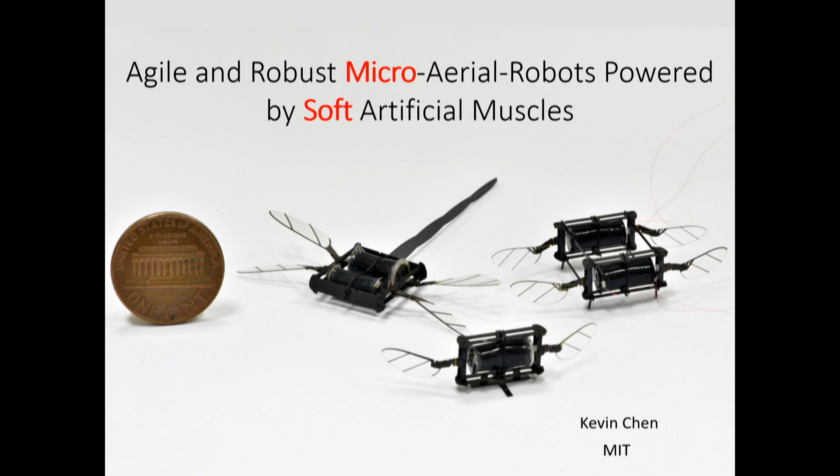Great, thank you so much for the nice introduction. Okay, let me get started. So I want to talk about agile and robust micro-aerial robots powered by soft artificial muscles. If you look at the title, there are two keywords: micro and soft. I want to spend the first 10 minutes explaining what micro-robots are, and then focus on a new class of micro-robots powered by soft artificial muscles.

When most people think about robots, they think about large-scale robots like legged robots, humanoid robots, trains or airplanes, spanning the scale of meters to hundreds of meters. On the other end of the spectrum are very tiny robots made with MEMS technology, ranging from tens of microns to hundreds of microns. What I want to talk about today is insect-scale robots, specifically ranging from 1 to 5 centimeters, weighing from 10 milligrams to 10 grams.

As a quick example, when I was a graduate student at Harvard, we worked on a project called the RoboBee. The goal of the project was to create something with similar size and functions as bees in nature. So very quickly, I want to address several questions together.

The first question is, why do we study microrobots? To me there are two answers. The first is that by leveraging interesting physics at the centimeter scale, we can enable new functions in this robot. In this case, by leveraging flow similarity, we showed the same robot was able to both fly and swim using the same actuators and wings.

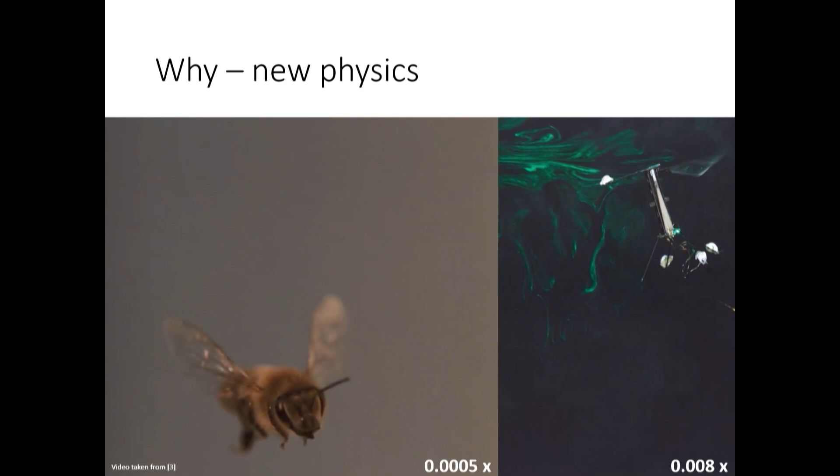More than that, we can use a micro-scale robot as a platform to investigate interesting physics at the centimeter scale. By looking at the flow field generated by a flapping wing robot, we can infer the lift and drag generation mechanism of flying insects.

The second question I want to answer is, what makes micro-robots unique compared to larger-scale robots? The short answer is that inertia becomes a lot less important, whereas surface effects become a lot more important. As a consequence, you can drop a legged robot from very high above and see very small changes to its performance. More than that, my colleagues have shown that micro-robots can jump off the surface of water, something very challenging, if not impossible, for larger scale robots.

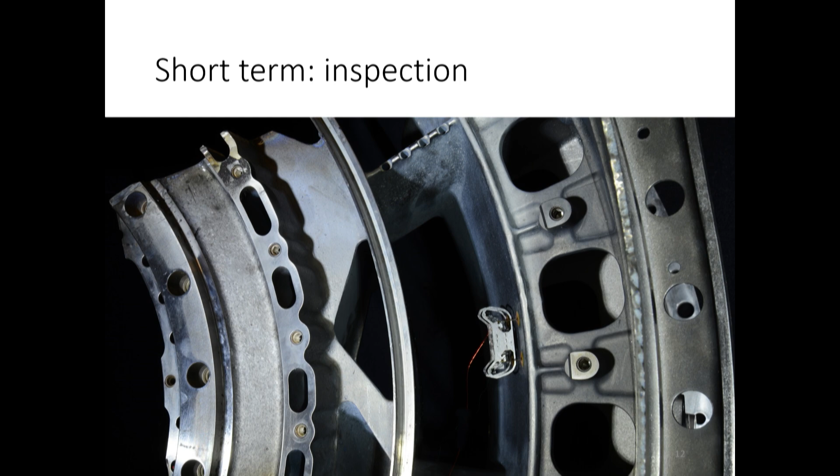The next question is, what are potential applications of micro-robots? In the short term, I can think of many. For example, I can put a camera on top of a legged robot and teach it to climb inside a turbine engine and look for cracks. In the longer term, I'm envisioning using a large number of micro-scale robots applied into complex situations.

Now, this vision is fairly far-fetched. There's a lot we cannot do right now, so I'll come back to the major challenges toward the end of this talk. What I want to do today is tell you about 3 examples of micro-scale robots. The first theme relates to the fact that micro-scale robots, although tiny, can do multiple things in multiple environments that are sometimes challenging for larger-scale robots. Then I'll spend most of my time today on a third project, a new class of micro-robot we've created at MIT, powered by soft artificial muscles.

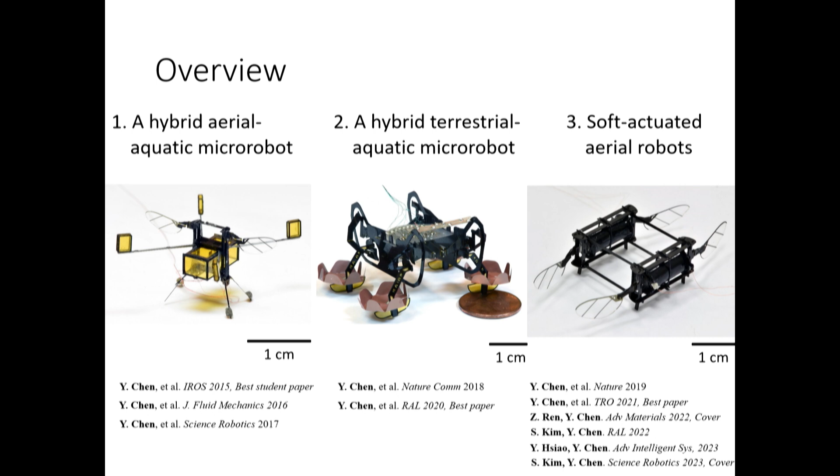So first, let's start talking about flying robots. If I want to make a flapping wing robot that can fly, I first look into nature for inspiration. Imagine my arm as the leading edge—the wing stroke motion is actively controlled by an actuator, whereas the wing pitch rotation is passively mediated by a compliant flexure. This is a quite complex system that requires us to study the fluid structure interaction. We've set up a physical setup that allows us to capture hundreds or thousands of flapping wing videos.

And not only can we capture the flapping wing kinematics, we can also measure the associated fluid flow. In this case, by looking at the particle image velocimetry experiment, we can measure the flow field and the corresponding vorticity field. By looking at the growth and shedding of leading edge vortices, we can develop a lot of intuition about how efficient our flapping wing motion is.

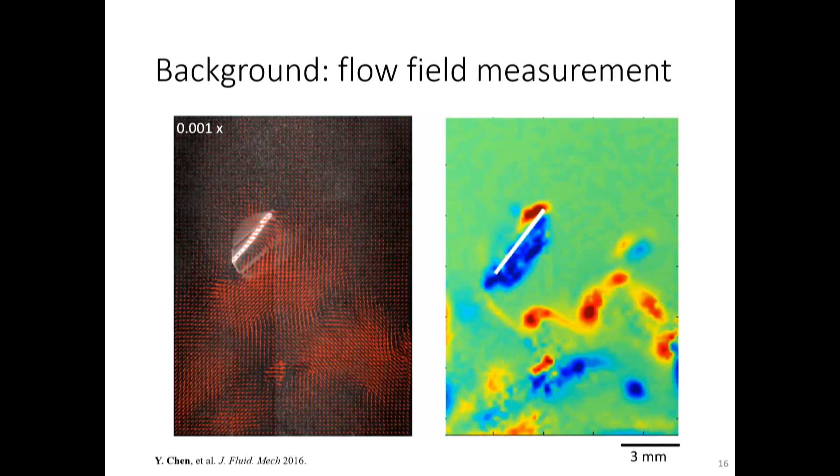In addition to creating at-scale experiments, we also develop our own numerical solvers for simulating flapping wing flight. In this case, we are showing you the pressure profile on the wing surface, and the isovorticity contour again allows us to infer about the efficiency of the flapping wing system.

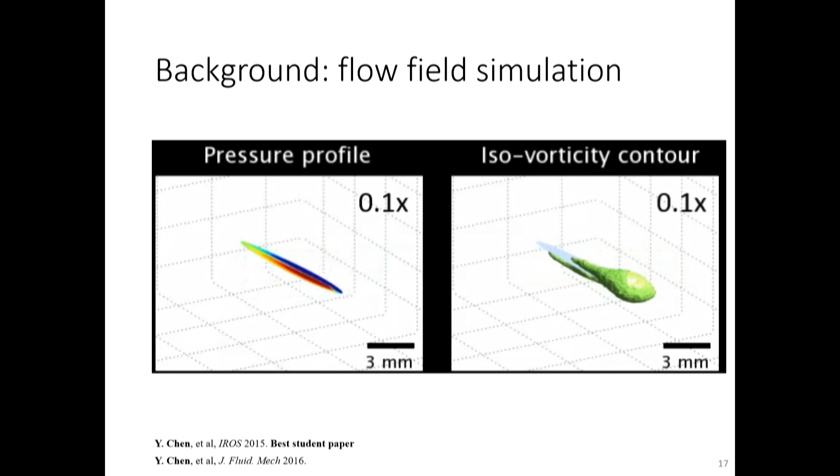With this suite of numerical tools and experimental tools, we are ready to ask interesting questions. For example, the question we want to ask is, is there any similarities between flapping in water versus flapping in air? And if there is similarity, what interesting robotics functions can we enable?

So we proposed a project. We want the same robot to be able to fly, to swim, and also making transitions from air to water and from water back into air.

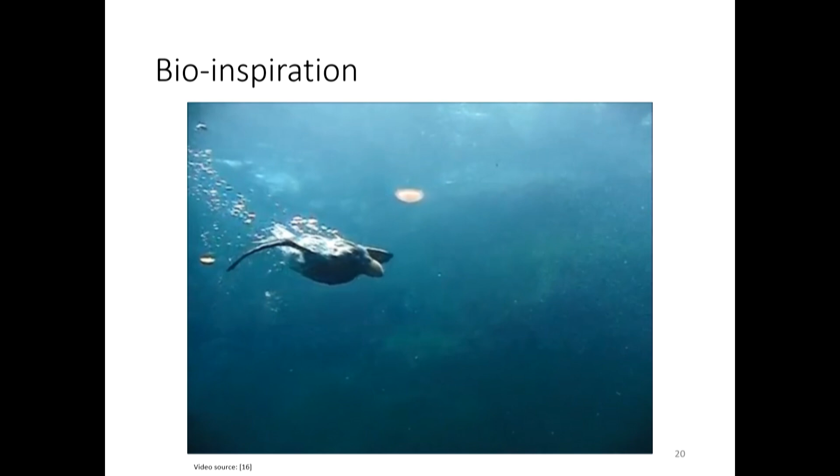To solve this challenge, we first look into nature for inspiration. Puffins are quite amazing animals. They can fly, and they can take a dive into water. Once they're under the water, they will change their flapping frequency so they can swim around and chase for prey. Using a similar idea, we created a new robot with four wings for added lift, buoyant outriggers for maintaining stability on the water surface, and more interestingly, a gas collection chamber for impulsive takeoff.

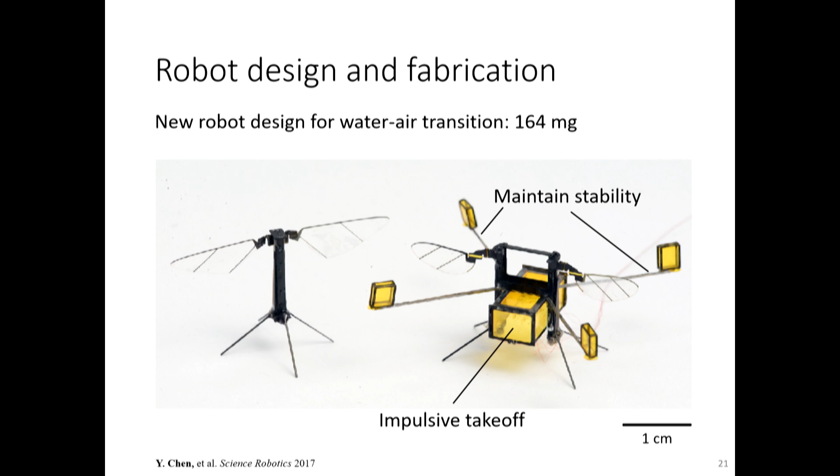So I don't want to spend a lot of time focusing on this project, so let me just show you what this robot can do. If I start this robot submerged in water, it will flap its wings at a relatively low frequency on the order of 10 Hertz, and it will reach the air-water interface.

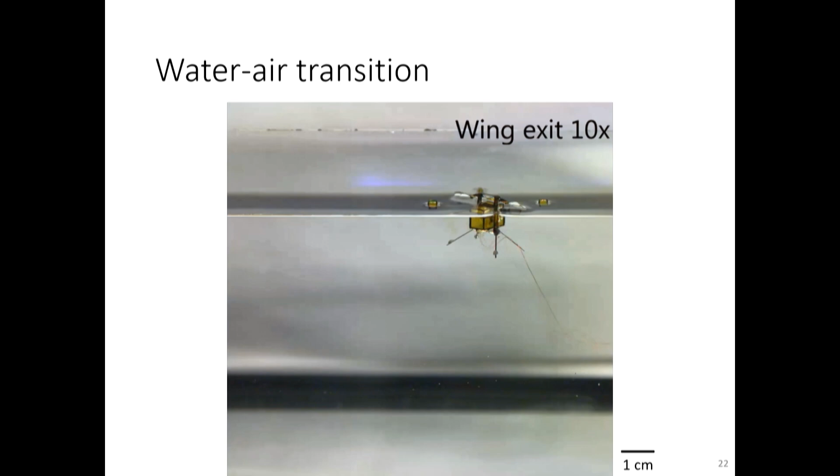Once it reaches the water surface, we will turn off the wings and turn on a parallel plate. What the parallel plate does is convert water into a mixture of hydrogen and oxygen, and the buoyancy force will slowly push the robot's wings and fragile structures out of the water surface. And more than that, now the combination of gases can be used as fuel, and we're going to ignite them so that we can generate a huge force to break the water surface.

So I recommend you to pay attention to this video. We ignite, and then this combustion completes within 1/1000th of a second, impulsively generating a large enough force to break the water surface, which allows the robot to transition back into air.

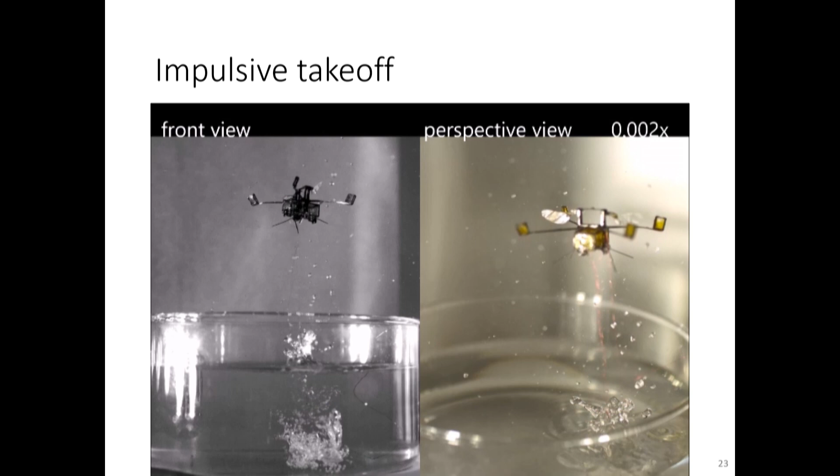Now, at this moment, the robot cannot fly immediately after this, just because of all the water that's on the robot. It has to wait for about 15 minutes for it to dry, and then it can fly again.

So in summary, we have created a 164 milligram robot that can do multiple things, including flying, swimming, transitioning from air to water, and impulsively transitioning from water back into air. So this is one demonstration of how a tiny robot can do multiple things, and some of those tasks can even be challenging for larger scale robots.

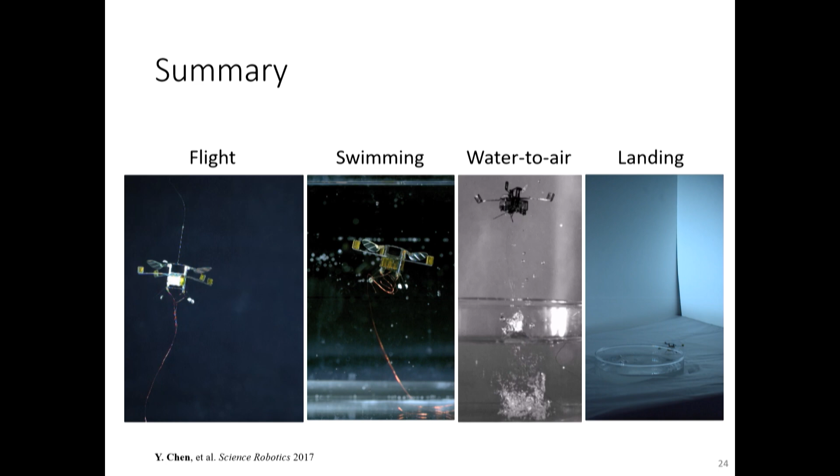Following the same thread of thought, now I want to introduce another project in which we started to think about multimodal locomotion in legged robots.

If I think about the previous project, we used combustion to overcome surface tension forces that's over 10 times the weight of the robot. Because at the very tiny scale, surface tension is much, much larger than the weight or the forces that the robot can generate. On the other end of the spectrum, as humans, we barely feel surface tension at all. And that's because our weight is more than 1,000 times that of the surface tension that we feel.

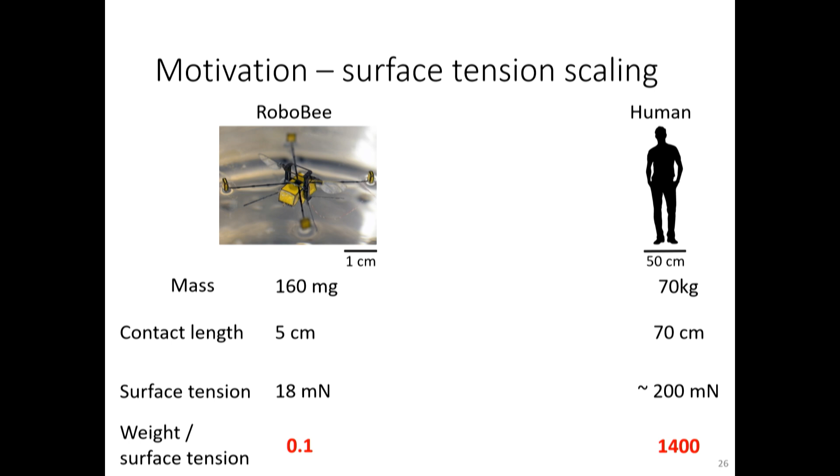Well, if you create a slightly heavier robot that's on the order of a gram, and if its contact length is on the order of 10 centimeters, then surface tension forces and the robot weight are on the same order. Now, if you can manipulate the surface tension forces, you can really start to do something interesting. So again, we return to a question in physics: how do we control the magnitude of surface tension forces? And if we can control surface tension, what additional locomotive capabilities can we enable?

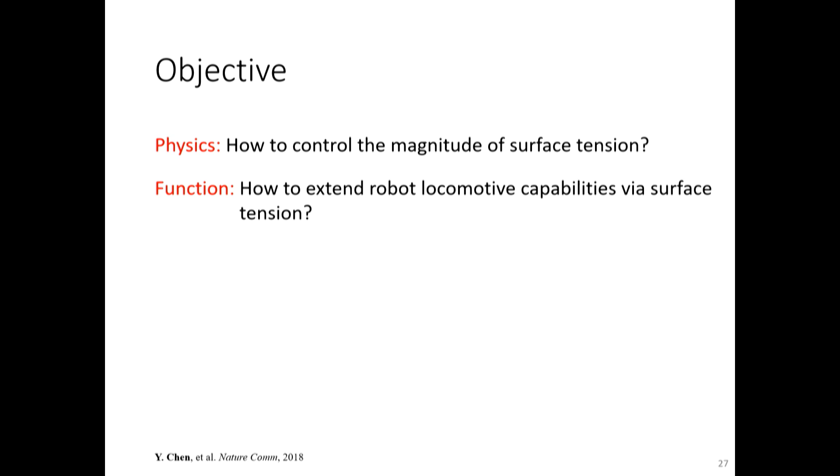So we came up with a new project in the sense that we want the same robot to be able to work on land, on the surface of water, controllably transition into water when it wants to, and eventually return back onto land.

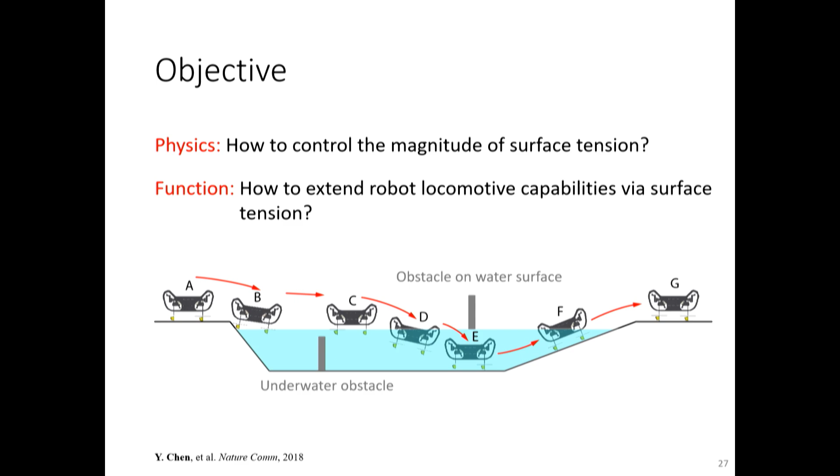What's really challenging in this case is that sometimes the robot has to generate forces less than water surface tension, and sometimes it has to reduce the surface tension so it can sink. Without going into the details of implementation, we used a physical phenomenon called electrowetting, which allows us to modulate the contact angle and therefore change the surface tension forces.

Let me show you a demonstration. This robot starts on land, transitions onto the water surface, and swims to a targeted site. Once it reaches this site, we turn on the parallel plate, and the electrowetting footpad will sink the robot underwater. Now the robot is completely submerged, and then it will climb this incline to return back onto land.

So in this very short demonstration, there are many things happening. The robot is leveraging interesting physics to control surface tension forces. Therefore, it can either walk on the surface of water or transition underwater. The process of transitioning back onto land also requires the robot to fight against a surface tension force that's larger than its own weight.

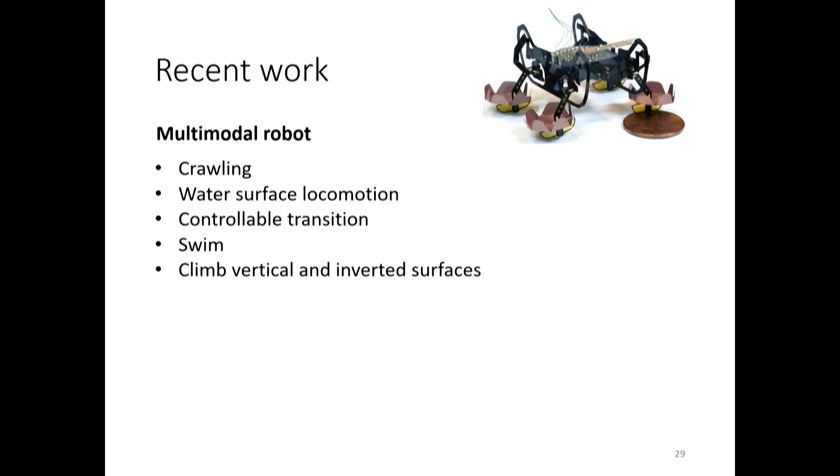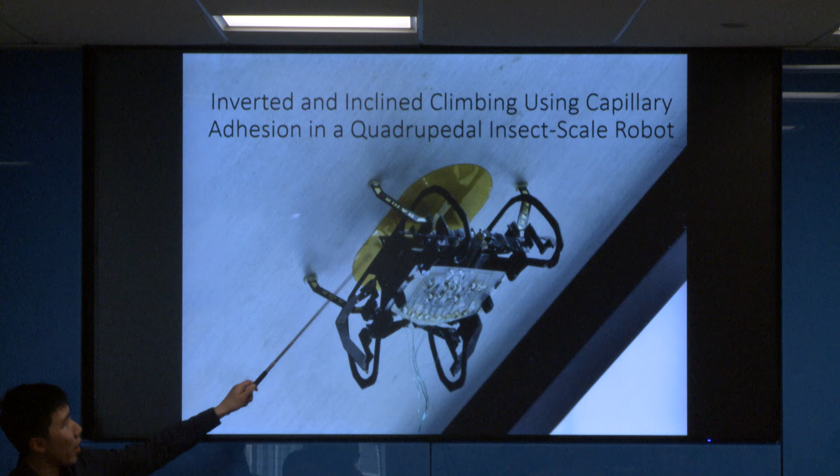Until recently, we were thinking about continuing to extend the locomotive capability of this robot, and specifically, we want this robot to be able to climb on walls and ceilings. At MIT, we simply put a compliant Kapton footpad on the belly of this robot.

We leverage a combination of capillary effect and adhesion forces. If we put a very thin water film in between the interface and the adhesion pad, there's a large adhesion force that maintains the robot on a surface, but the lubrication force allows the robot to slide along the surface. As a consequence, climbing becomes passively stable, so you don't really need a lot of sensing and feedback control. The robot can just operate as if it's walking on land, and it can walk inverted on a surface.

In summary, in the first two projects, I've shown you two examples of microrobots that can leverage interesting physics to perform interesting functions, and some of those functions, I would argue, are unique compared to larger scale robots.

Now I want to change gears and spend most of my talk today explaining a class of new soft actuated microrobots we are focusing on at MIT. First, I want to zoom out a little and say that our longer term vision is to create a swarm of ubiquitous and multifunctional microrobots that can operate in realistic environments.

So far, the examples I've shown you demonstrate that microrobots can operate at high frequencies, and they're very precise. My colleagues in this field are solving key problems in sensing, control, and power autonomy, but I want to argue there are key questions that we are missing.

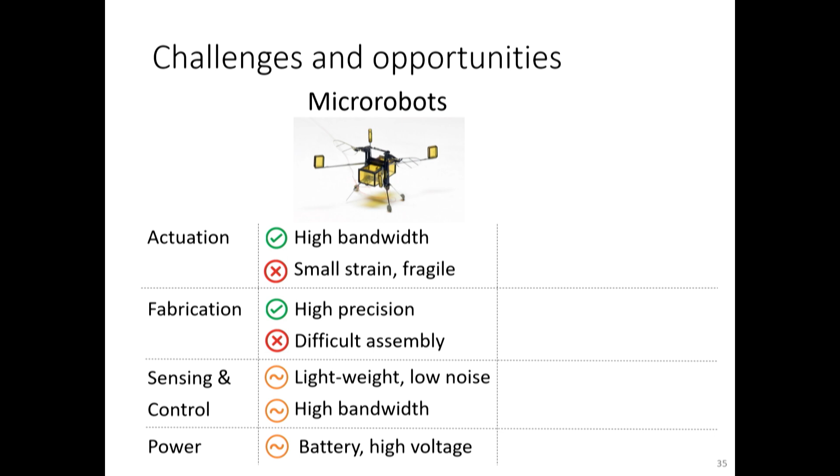I propose we look into another field, called soft robotics. For a very long time, people have known how to make soft robots cheaply, and more than that, soft robots have a very large range of motion. We have new sensing and control methods for soft robots, and in addition to using a battery, soft robots can also be powered by pneumatic or chemical sources.

But soft robots also face their own challenges. Specifically, most soft actuators are slow and not as precise as rigid actuators, and as a consequence, the functionality of most soft robots is limited compared to state-of-the-art rigid robots. So how do we address challenges in both fields?

We propose to look into a new direction, what we call hybrid soft-rigid microrobots. Specifically, we envision that future microrobots will be powered by soft artificial muscles that have very high power density, while having rigid appendages for effectively interacting with the environment.

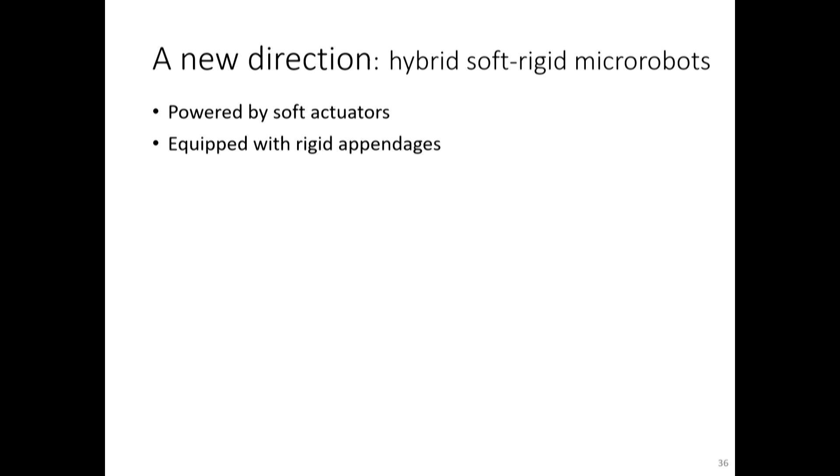I want to show you an example of a robot we are focusing on today at MIT, which is a flying robot powered by a soft artificial muscle. I want to convince you of several things. First, I want to show you that this soft artificial muscle can operate at hundreds of hertz, much, much faster than existing soft actuators.

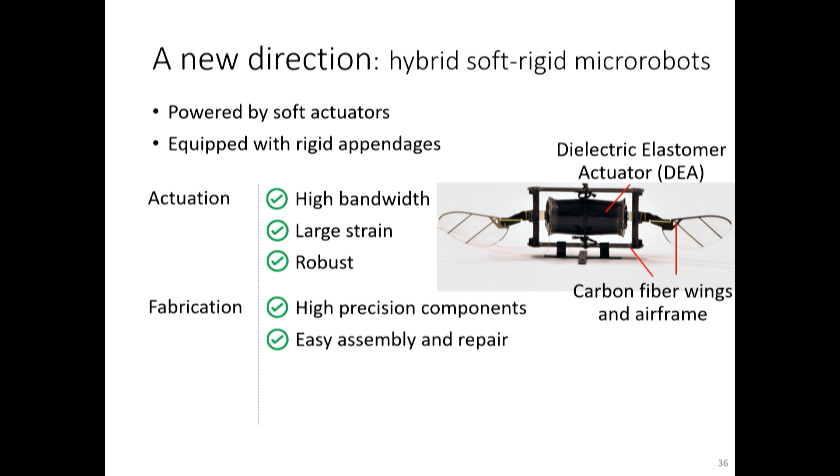I also want to show you that this robot still has very precise rigid components, such as transmissions and linkages, so we can control them with high precision. More than that, because we are combining soft and rigid, hopefully I can convince you we can enable interesting, unique functions, such as sensing collisions or recovering from collisions.

On a higher level, this soft robot consists of both rigid and soft parts. It has rigid airframes, precise rigid transmissions and linkages. What's quite unique is that the central part of this robot is powered by a dielectric elastomer actuator, which is soft in nature.

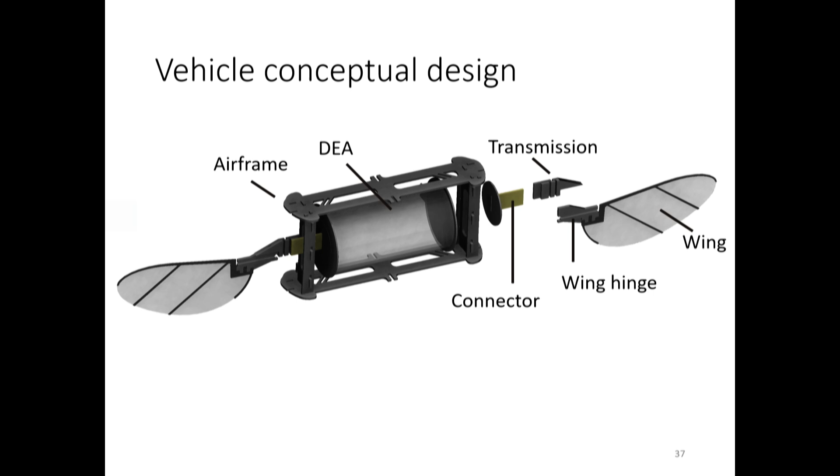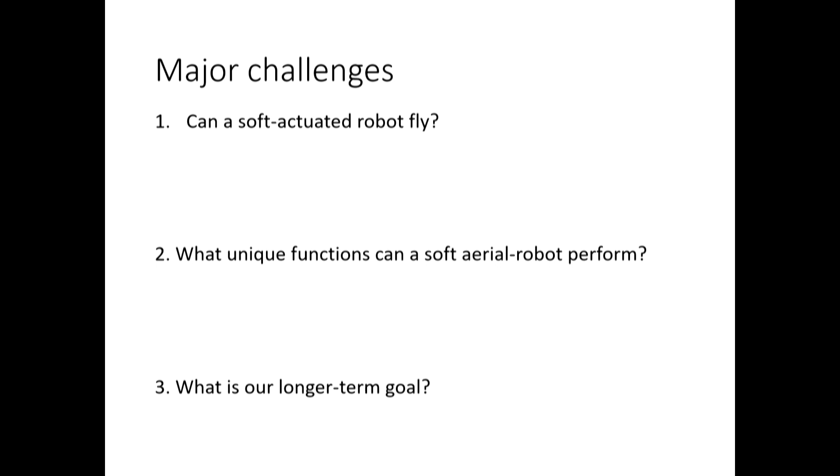Our research is motivated by the desire to address key challenges, so I want to answer three key questions. First, I want to convince you that soft robots can fly. If I show you that, I can also show you why we are making a new class of aerial robot. Hopefully I can demonstrate new functions in those soft robots. Finally, I also want to tell you about our longer-term vision about where we want to take this micro robot. First, let me convince you that soft robots can indeed fly.

I have experience playing with rigid actuators for many years, and specifically I struggled with piezoelectric actuators for a very long time. Piezoelectric actuators are great in the sense that they are very high frequency and very precise. However, they have very tiny strain, which means assembling them into a micro robot takes a lot of training. Even worse, when a flapping wing robot is driven by a piezoelectric actuator, you have to be very careful about operating it. You don't want the wing to hit an obstacle, because otherwise the impact can be transmitted to the actuator, which may cause it to crack.

So here at MIT, we developed a novel soft actuator. I want to show you that this dielectric elastomer actuator can operate at an equally high frequency range, on the order of 500 Hertz, while having very large strain, on the order of 10%. Because it's intrinsically soft, we can install this actuator much more easily into a micro-scale robot, and we can make a lot of them more scalably.

So with this actuator, let's talk about the key requirements for achieving flight. Let's not worry about the mathematical equations, just keep in mind the key ideas. To fly a robot, you have to satisfy a few requirements. First, you have to generate a lift force larger than the weight of the robot. While generating lift, you're inevitably also generating drag force, so the block force of your actuator has to fight against the drag force through a transmission ratio. Finally, you want to match the resonant property of your robot to the resonant property of your actuator. What I really focus on today is the requirement on bandwidth, free displacement, and block force of the soft actuator.

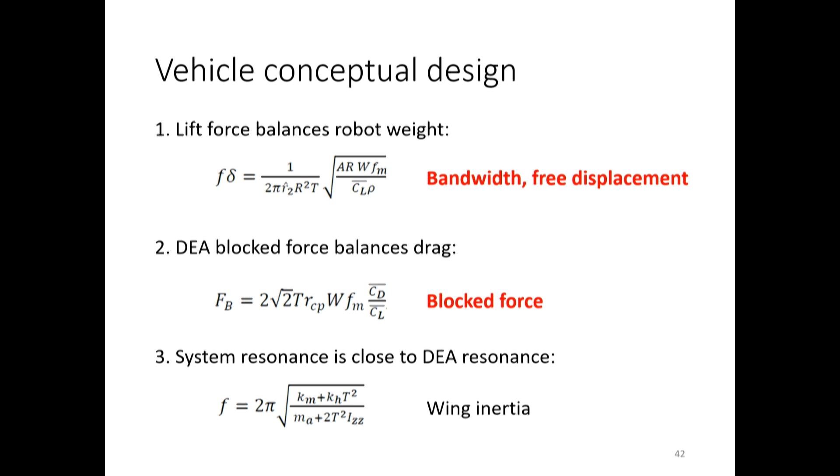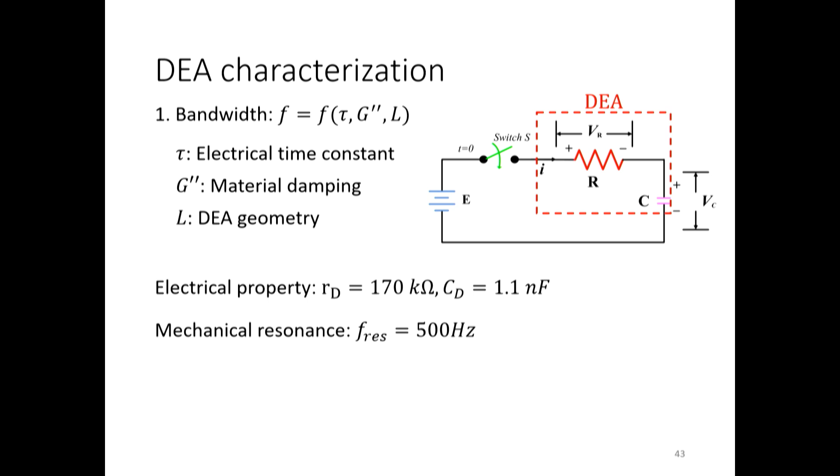First, let's talk about the bandwidth of the actuator. We model the actuator as a series RC circuit. We measure the electrical property and find the RC time constant is on the order of 0.2 milliseconds, which translates to an RC frequency of 5 kilohertz. So the bandwidth is not limited by electrical properties, but rather by mechanical properties. We spent a lot of time choosing elastomers of low viscoelasticity and optimizing the geometry of the soft actuator to generate a resonant frequency as high as possible. In the end, we targeted something on the order of 500 Hertz.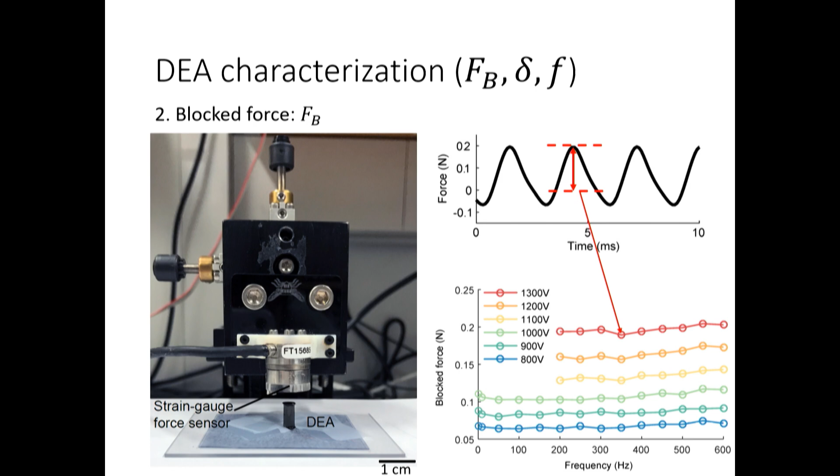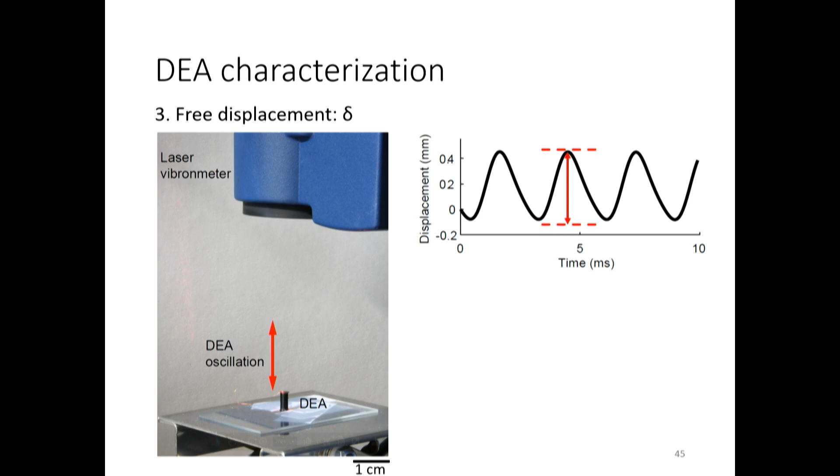After knowing the behavior of this actuator, we can also measure the free displacement. Again, we place the actuator under a laser vibrometer and drive it with a purely sinusoidal signal, measuring the peak-to-peak motion as the free displacement. We vary the driving frequency and amplitude to map out the behavior. You can see from this plot that the resonant frequency of the actuator is on the order of 500 Hertz. Now, if I multiply the block force and the free displacement, I can estimate the energy density of the actuator, or its power density.

It's actually a quite important takeaway here. Based on the analysis we did a couple of slides before, we reasoned that as long as an actuator has a power density higher than 200 watts per kilogram, it is possible to achieve flight. In this case, our soft actuator has a much, much higher power density, which really implies that flight is possible.

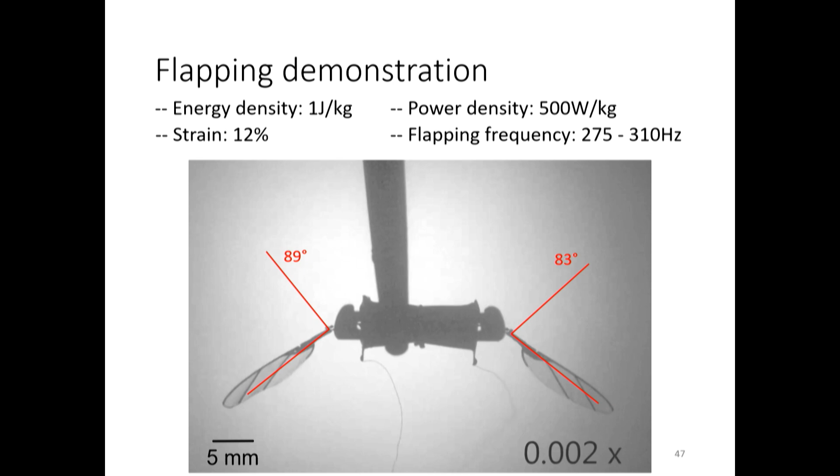So with that, we installed the soft actuator into our robot. In this particular video, the robot is flapping its wings at 280 hertz, which is even faster than the state-of-the-art rigid robot. Just by looking at that video, having looked through thousands of flapping videos, we know that we are generating enough lift forces.

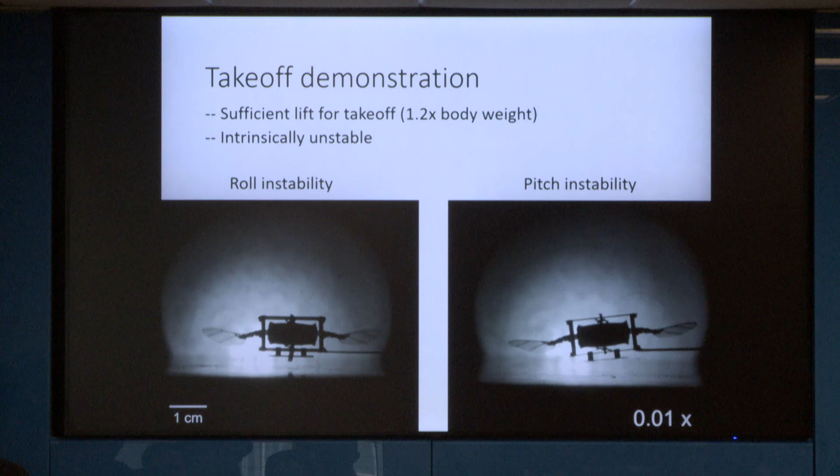So about 4 years ago, we demonstrated the first lift-off of a flapping wing robot. You can see the artificial muscle in the center really behaving like true muscles, elongating and contracting. I would say this is a very exciting moment for soft roboticists, but not very exciting for aero roboticists, because this robot is flipping over in 0.1 seconds, intrinsically unstable, so it's really not very useful yet.

Our main task is to stabilize this robot. So to stabilize it, we put two units together. And if I can somehow induce a yaw torque, that is, teach the robot to rotate relative to its body z-axis, then effectively the robot is behaving as a spinning top, and I can use that precession to stabilize the robot.

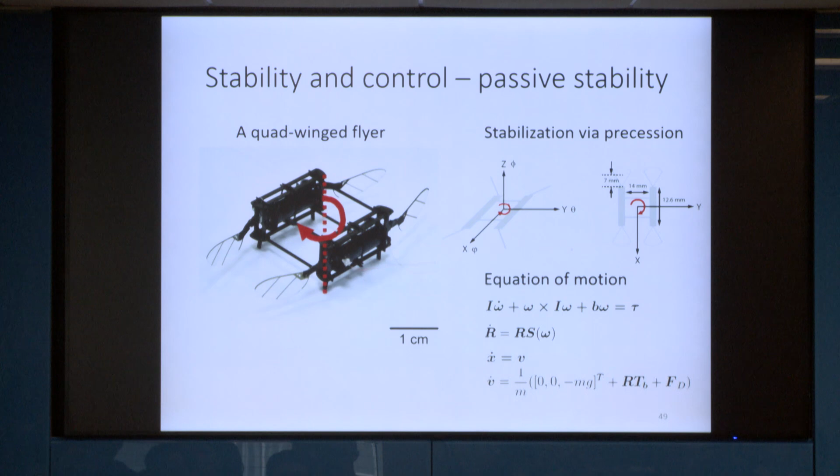Of course, to prove stability, we have to look at the relative contribution between the moment of inertia tensor and the yaw torque. But skipping over the mathematical proof, in both simulation and experiment we've shown this robot is passively upright stable, and it can fly upward at about 30 centimeters per second. This is impressive because there is no sensing or feedback control involved, and I'd argue this is very important for tiny scale systems lacking the ability to do sensing at a high frequency.

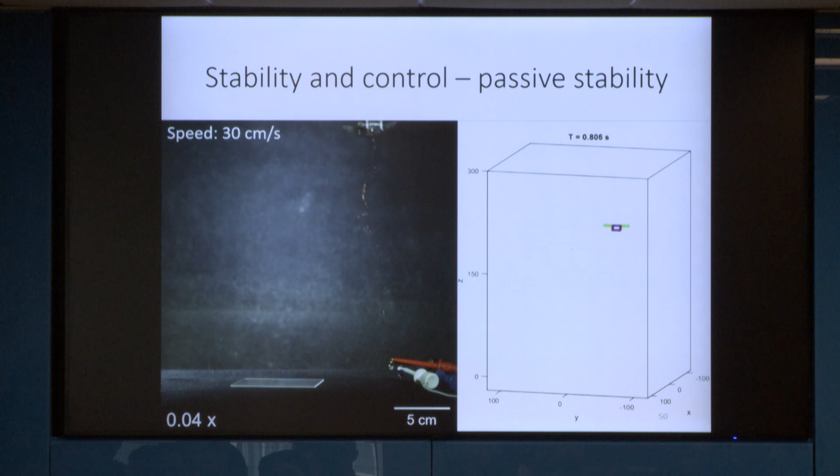So far I've shown you that soft robots can take off, and they can be passively upright stable. The key question for soft robotics is: are soft robots controllable at a high frequency? Our lab has spent the past 4 years working on flight controllers.

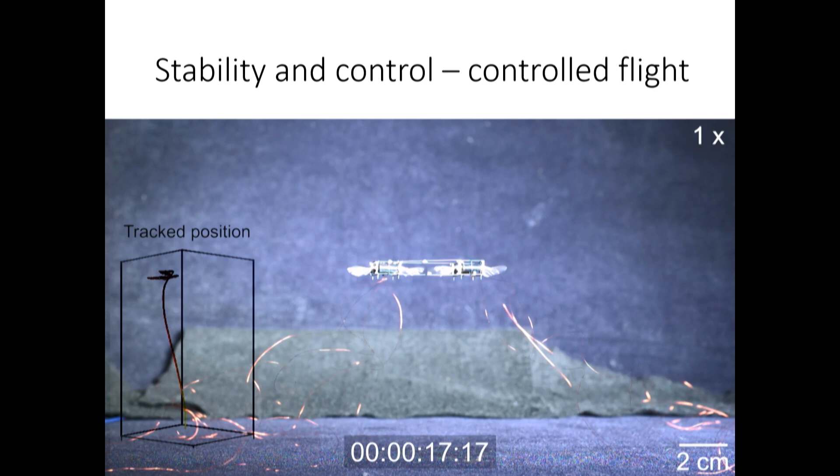Let me show you something we achieved about 2 years ago: a 20-second hovering demonstration shown in real time. This is one of the longest hovering flights done among any sub-gram aero robot at that time, and as you can see, this robot is really quite stable, staying at a fixed point very stably. Looking at the attitude or position error, the maximum attitude error is about 2 degrees within this 20-second flight, and the position error is about 1 centimeter.

Our lab is continuing to push the endurance of the robot. As of 2 years ago, we could get to 20 seconds. As of last year, we got to 40 seconds. And hopefully by the end of this year, we can push it to be on the order of 100 seconds or so.

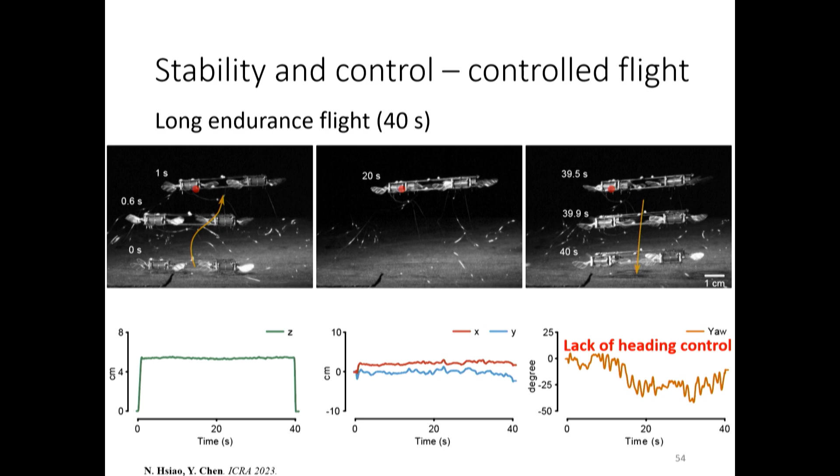But there is one key shortcoming: although we have position control, we don't have heading angle control. So when the robot is flying, it's just passively yawing. Imagine in the future I want to control the robot to stare at something - that would be very challenging.

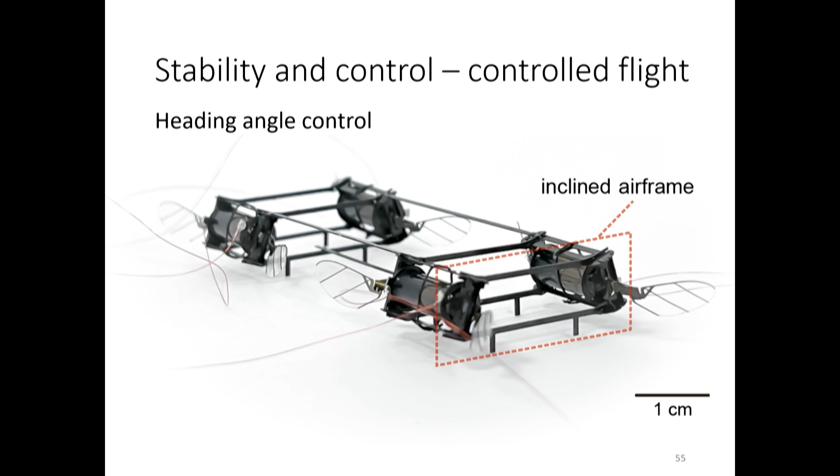To solve this, we propose a new configuration in which we slightly tilt the robot so we can use a component of the lift force to generate yaw control torque. Skipping over the controller implementation details, we can now track the yaw angle quite well - the robot turns left, then it's commanded to turn right, then it turns forward, and then it lands.

There's still a little bit of coupling, meaning that when the robot turns, we still have a little bit of coupling in the position error. But I'd argue that suffering a couple of centimeters of position accuracy for fairly good attitude heading angle control is reasonable.

Until very recently, we started collaborating with Professor Jonathan How's team, implementing a model predictive controller on our robot. So the robot can now track trajectories quite well, and more than that, we can track aggressive trajectories, such as a somersault. I'll say more about that later in this talk.

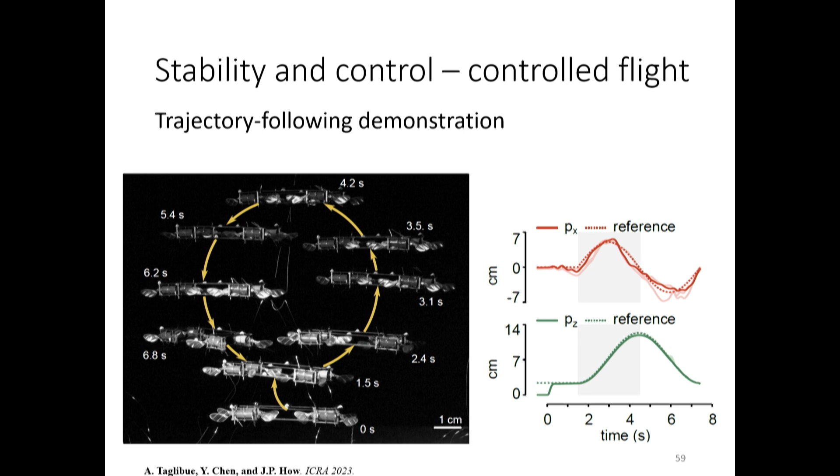So hopefully, so far, I've convinced you that indeed, soft robots can fly, and they can fly just as well as the state-of-the-art rigid robot at the micro scale.

But the more interesting question is, what are unique flight capabilities we can demonstrate? Now, the first thing that comes to mind is that soft actuators are robust.

So now I can repeatedly run a wing into an obstacle, and the actuator sees no damage. And I can push this further.

I can try to damage the robot by putting a lot of needles into the actuator, or even cut up the wings.

And also, because I can now be very harsh to the actuator, I can send in very aggressive control signals. How about turning the actuator on and off in 5 milliseconds so I can do a somersault?

And more than that, because we make the actuator in-house, how about putting electroluminescent particles in the actuator so it can shine out light when it flies?

So let me show you this. First, when the robot is flying, we can gently push down the robot, and the robot can return to the hovering set point. Now, this is really not very impressive.

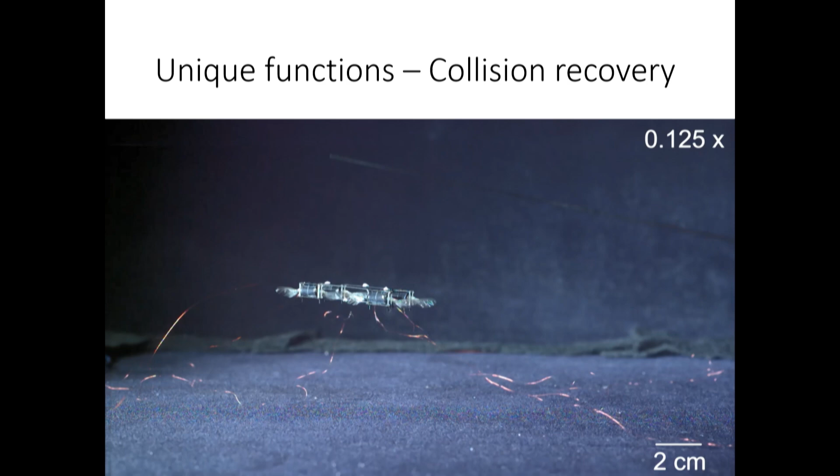I think most quadrotors can do this as well. But I think what starts to get interesting is if I start to hit the actuators of the robot, or more interestingly, hitting the wings of the robot. You can see that because of its low inertia, the robot is really resilient against collisions.

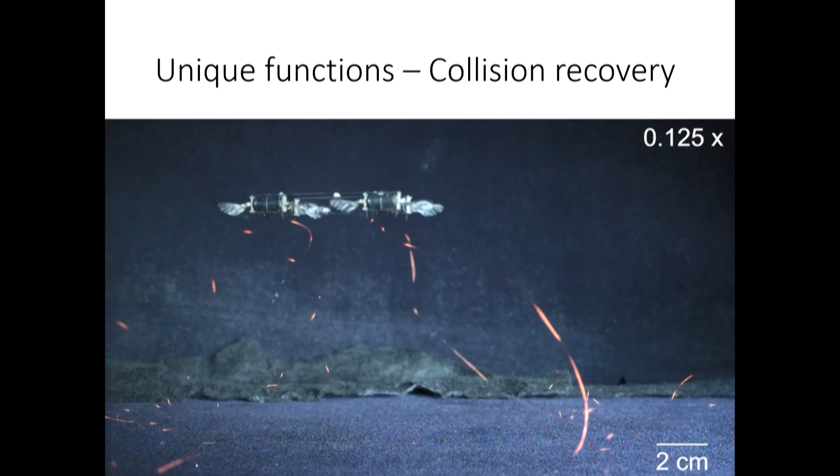And pushing this a little bit further, we are also interested in studying how the robot fails. The most common mode of failure in most cases is the loss of a wing. Sometimes the wing hinge is torn and instantaneously the robot loses balance and crashes.

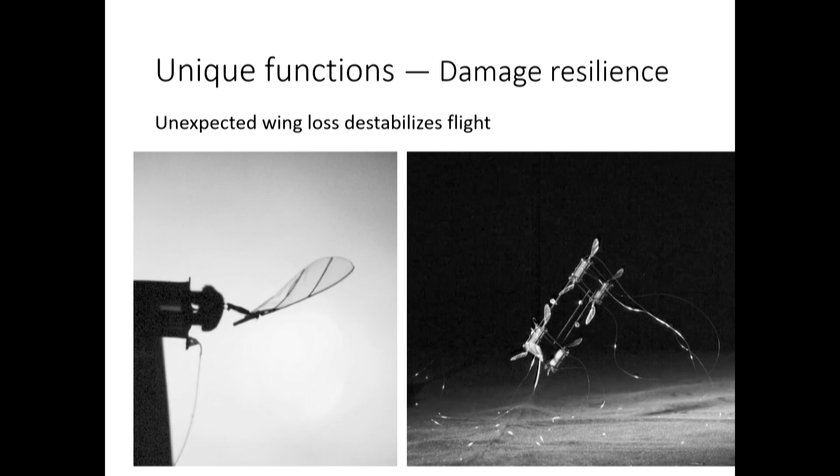Well, if you think about how fragile this robot is compared to real bees in nature, the animals are much, much better. The wings of bees can be fairly worn out, and they're still retaining very good flight capabilities.

And there is a community of colleagues who are studying how beetles can fly, and they put electrodes into the flight muscle of those beetles, and the beetle can still maintain a very good level of flight capability. So the question we want to ask is: can we enable a similar level of resilience in our robot?

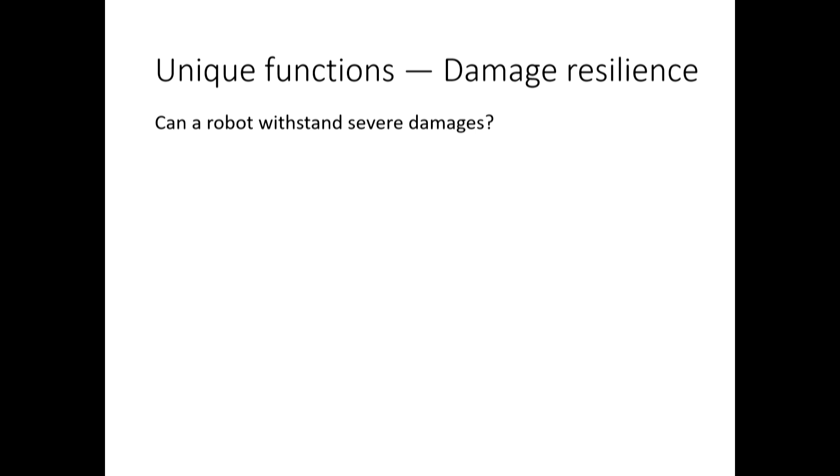Specifically, can we teach our robot to fly near a cactus, or even putting needles through the robot? So we identify 3 types of things we can do to the robot.

First, we can put a lot of needles through the actuators. Second, we can cut up large areas of the wing off from the robot. Or even worse, we can try to hit a hole in the soft actuator. And hopefully, the robot can still maintain its flight capability.

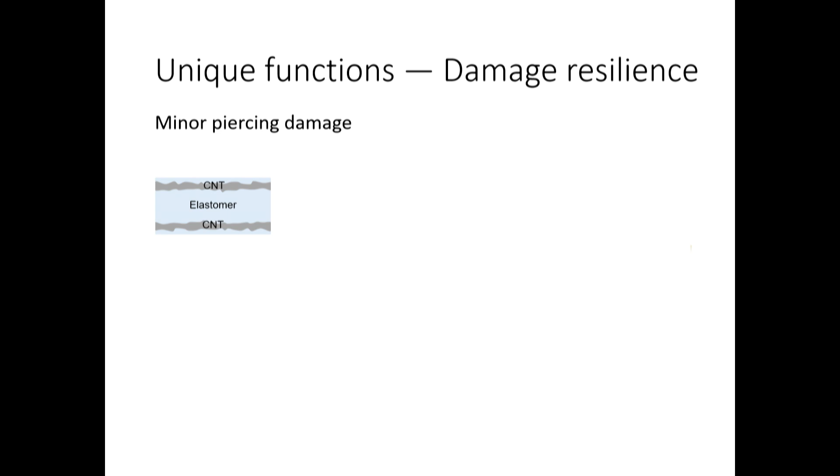On a higher level, dielectric elastomer actuators can be modeled as a soft capacitor. It's just consisted of an elastomer layer that's sandwiched by 2 compliant electrodes. So what's going to happen when I use a needle to pierce through the actuator is that I'm going to generate a path to create an electrical short.

And to get rid of that shorted path, what we do is we send in a high voltage, and that high voltage will generate a lot of heat, which will tend to electrically isolate that defect from the bulk electrode. And then once that defect is isolated, the actuator can be functional again.

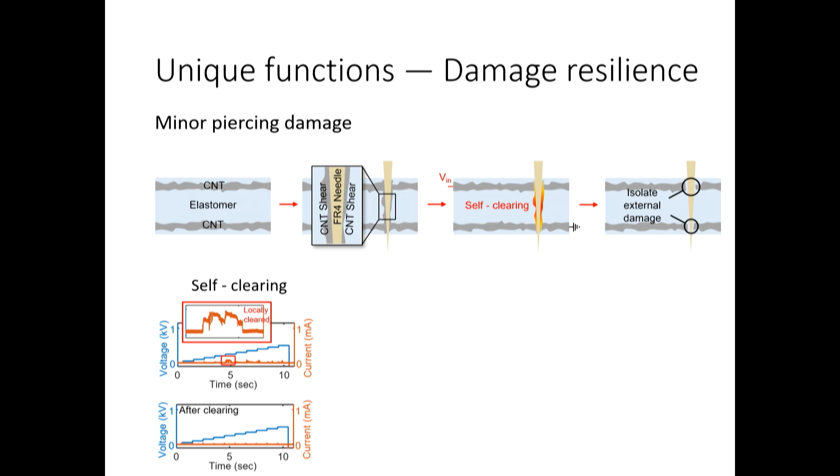This self-clearing method is very robust in the sense that there's no additional repairing needed. All you need to do is send in a high voltage, and in some sense, the actuator is able to reheal itself. This process is so robust, in fact, that my student has been able to put tens or even up to 100 needles through this actuator.

To the extent that in the end, they stopped not because the actuator failed, but because there's no more space to put in needles. So let me show you how this works for a real robot.

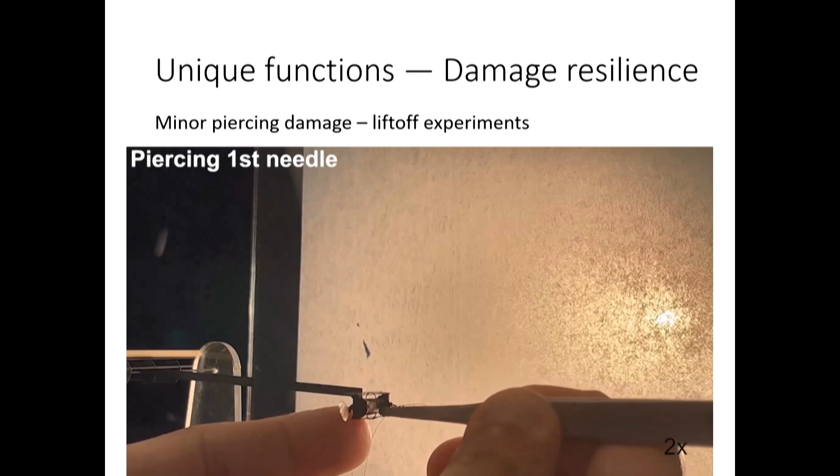We mount this robot on a lift-off stand just to demonstrate it has sufficient power to lift off. Okay, so without any damage, of course, the robot can lift off. And then what the student does is they will come in with a tweezer and puncture the actuator. Now the actuator is damaged, so the robot cannot fly anymore.

So we have to perform self-clearing. And all we need to do is, again, just command a high voltage.

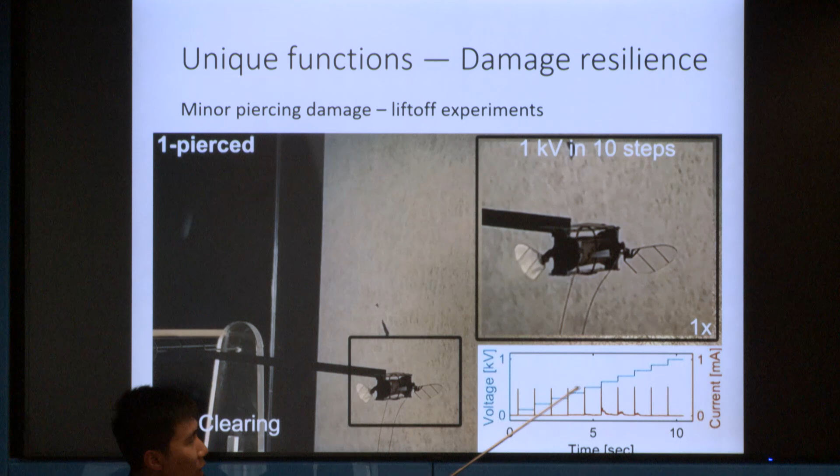As you can see, the current response here really signals we are generating heat to burn off the defects. Once we clear the damage, the robot can fly again. This process is highly repeatable, so we can keep putting more and more needles into the robot until it's very hard to insert more needles into the actuator. After being poked 10 times, the robot still retains a level of power density sufficient for enabling takeoff flight. This set of experiments really convinced us that the actuator is so robust and has such a high level of power density that it's able to retain flight capability after being damaged.

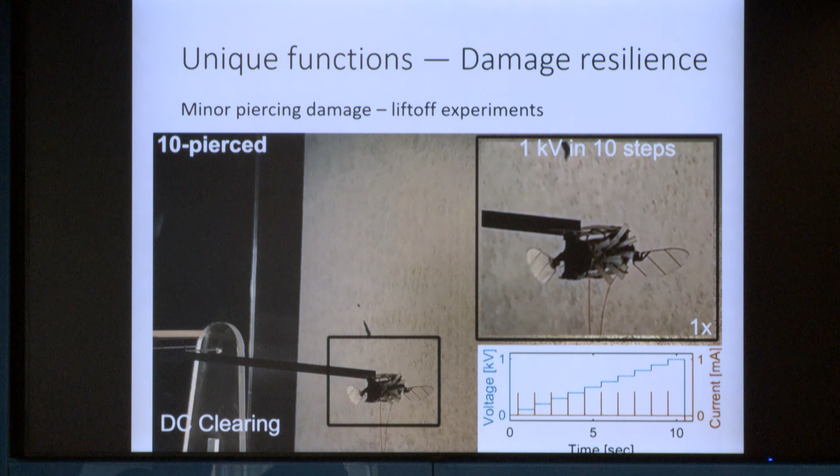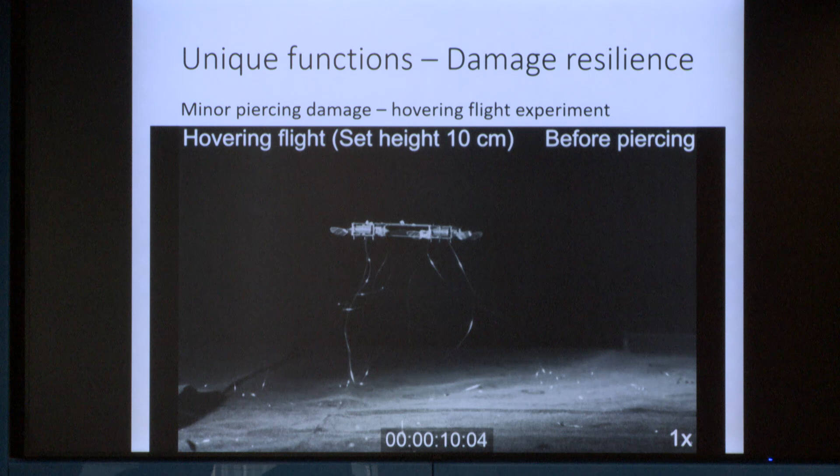But now let's think about controllability. In the next experiment, we first fly a particular robot for about 12 seconds. This is a healthy robot, perfectly in shape right now. After finishing this flight, the student will come in and poke the actuator of this robot with a needle.

As you can see, it looks like a quite painful process. It's not easy to put this needle into the actuator. Once we put the needle in, we again need to perform self-clearing, which means sending in a high voltage. Very slowly, the defects around this needle are cleared. Once that's done, we do a very short flight, on the order of 3 seconds, just to convince ourselves the actuator is still functional and the flight capability is unimpacted.

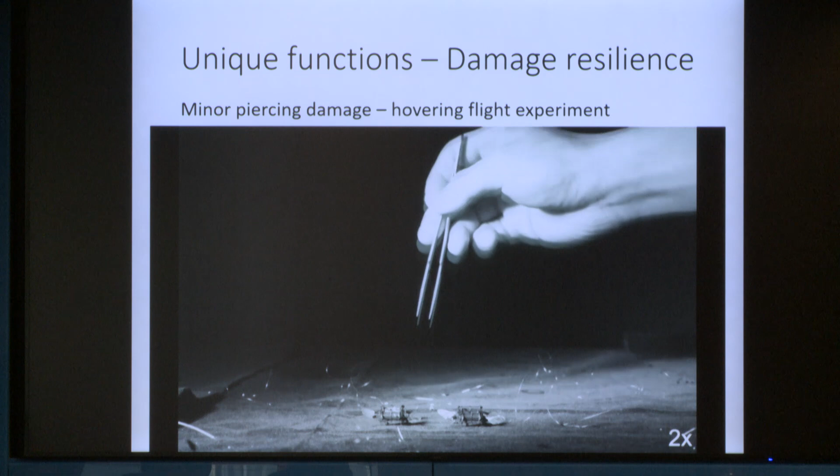Once we've done this 3-second short flight, we are convinced that the flight capability of this robot is not impacted, and then we can fly the robot for much longer — again, in this case, 12 seconds — just to demonstrate that the flight capability is not impacted.

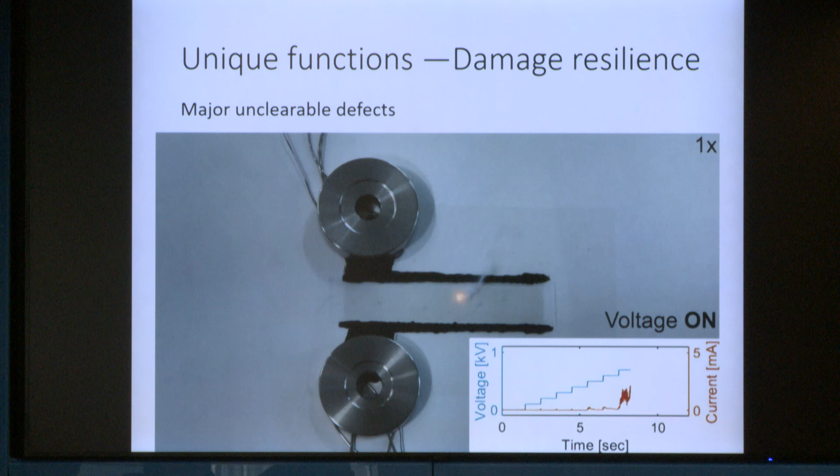So now I've shown you this robot can survive piercing damages, but let's think about something more extreme. How about if I puncture big holes in the actuator to the extent that I really expose the surrounding air? What's going to happen by sending a high voltage is literally you're going to set up a fire in the actuator. Once you set up those big fires, you create a huge defect, and the actuator is no longer functional. So how do we recover this actuator?

We came up with a method we call laser-assisted surgery. The idea is to use a diode pulse laser to cut across this defect so we can encircle it. Essentially, the laser creates a minor damage that isolates the major damage. Then I command self-clearing again, which will isolate the laser-assisted cut. Because the minor defect is now isolated, the major defect is also isolated. Let me show you how it works.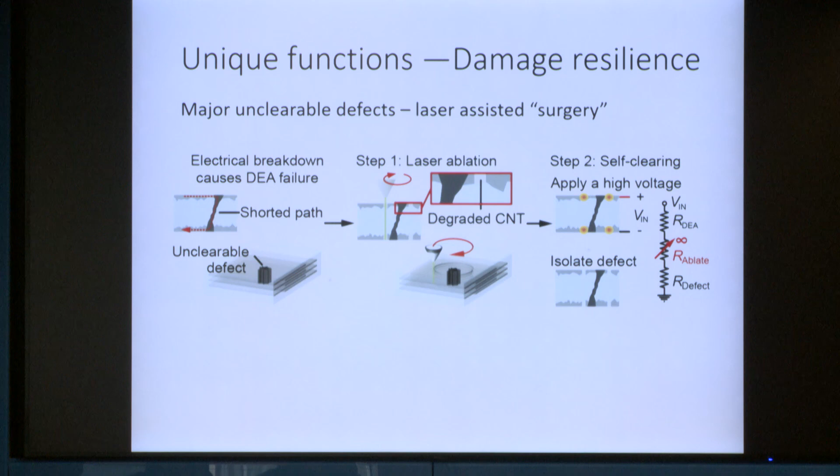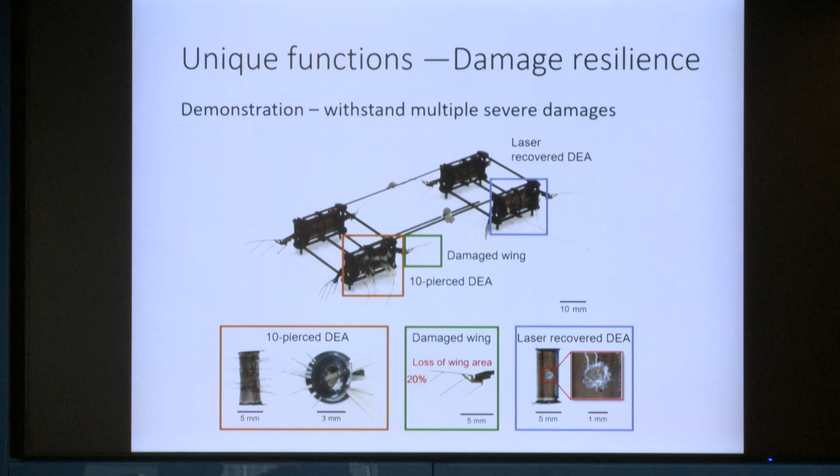We burn a big hole in the actuator, and after performing this laser-assisted surgery, we can show the robot is operational again. In the end, we've been able to produce one robot that suffers 3 types of damage: one actuator pierced by 10 needle punctures, one wing cut off by 20% near its wing root, and one actuator suffering a big hole burned in the center.

In this case, we do need to retune the flight controller, meaning we need to figure out the reduction in forces and retune our flight parameters. But after that, we can demonstrate an equally well-controlled hovering flight. I would argue that this video demonstrates a level of flight resilience that's really unprecedented among existing rigid flying robots. Now let me change here to talk about agile locomotion.

At least in simulation, we show that our robot can do a very quick somersault. What's interesting about the somersault demonstration in a small-scale robot is that because it has very low inertia, the speed of the somersault is really very high. In simulation, we show that a somersault can be done within 0.15 seconds — faster than any of the existing aerial robots.

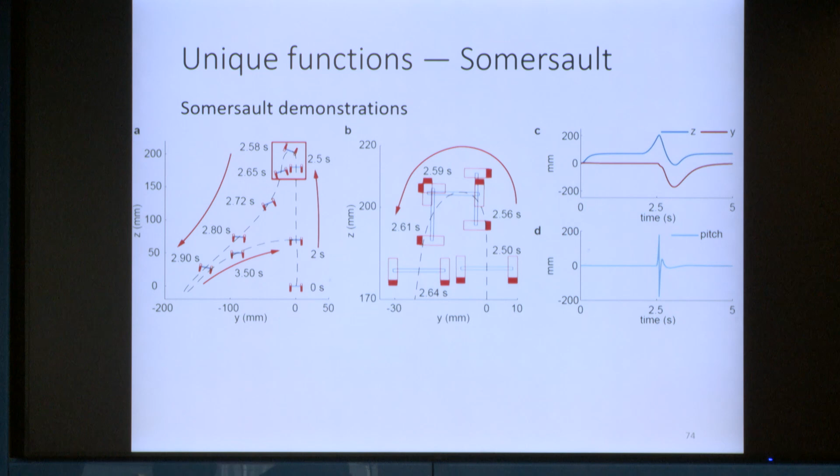Now let me show you what's going to happen in real time. You're going to see this robot take off and hover, then try to do a somersault very quickly, and then try to recover to the hovering set point. Now let me play the same somersault video in slowdown time.

In this case, the robot first hovers around the set point for 2 seconds, and then it accelerates upwards, tries to make a somersault, and then tries to recover its attitude, but it couldn't really recover, so it hits the floor and bounces back and eventually returns to the hovering set point.

One of the most challenging parts in this demo was trying to recover the attitude after the somersault. In this video, which is something we've done about 2 years ago, everything was done by a PD controller. So we split the flight into 5 phases: takeoff and hover, ascent,

trying to do a somersault open loop, try to recover, and eventually return to the hovering set point. Something we don't have a very good model of is what's the aerodynamic model when the bee is falling. Again, in collaboration with Professor Jonathan How, we recently have a much improved force mapping. So very recently, the robot is able to do a somersault without hitting the floor.

I hope I'll have more to say about this in the next few months. So in summary, we can perform a somersault, and we can perform 5 somersaults straight without seeing much change of the performance in the robot. And that again shows how resilient this robot is at this very small scale.

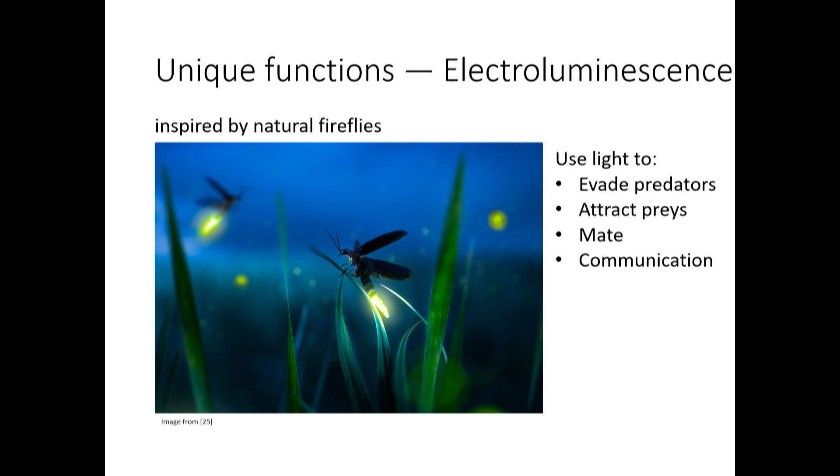Now let me change gear again and talk about bio-inspired functions. In this case, we take inspirations from fireflies. Fireflies are quite amazing animals. When they fly, they shine out light, and they use the light emission to communicate. Since we can make our soft actuators in-house, we can embed electroluminescent particles in the actuator so that when the wing flies, the robot can shine out different colored or patterned light depending on the type of particles we put into it. Let me show you how it works.

When the robot flies, we can take a couple of iPhones and film the flight of this robot as each of the actuators lights up. So it looks pretty cool, but in addition to looking cool, what we are really after is the ability to replace a very expensive motion tracking system.

Traditionally, to fly this robot, we have to use an infrared motion tracking system that sends infrared radiation that is then bounced back by Vicon markers. Now, if the actuator can emit light, the actuator itself can be used as an active marker, so that in contrast to using infrared-based tracking systems, we can probably just use a couple of cheap cameras and do motion tracking.

So we've implemented very simple computer vision algorithms, and we have compared our tracking result with the state-of-the-art Vicon motion tracking system. We've been able to show that our tracking result is quite good. We have an error on the order of a couple of millimeters and about 2 to 3 degrees.

So again, we are not very good computer scientists. Our code is not very efficient. So if some of you are working on computer vision, please reach out, and we'd love to collaborate and implement this algorithm in real time.

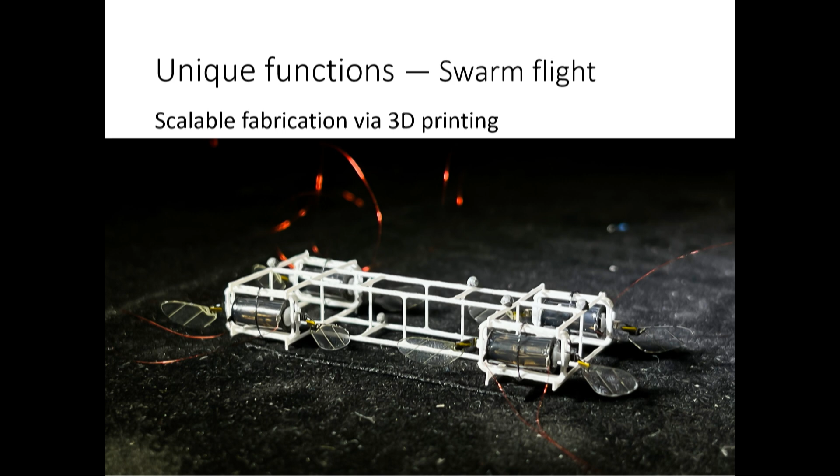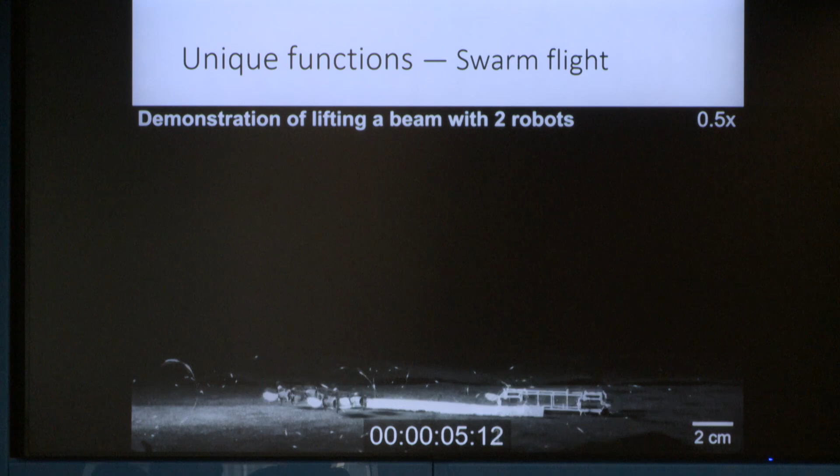About a few months ago, for the first time, we were able to fly 2 micro robots together. In this case, while they're flying, they're trying to carry a small payload. Now, again, we are not a planning and control lab. We don't do very fancy control algorithms. So really, the 2 robots don't know that they're collaborating and carrying a payload.

In fact, my student had so much fun that when he was flying those 2 robots, he tried to put our lab name on this object. But I hope what I can convince you is this is really interesting. This is really moving towards swarm flight.

What we are really interested in for the next few months is teaching the robot to do some pollination demonstrations, teaching 2 of them perhaps to land on flowers, take off, and land on other flowers. Again, I hope I'll have more to say about this in the next few months.

So in summary, we have created a unique soft aerial robot that can demonstrate multiple things. This robot is robust against collisions. It's fairly agile, considering it's only 3 to 4 centimeters. Its top speed now exceeds 70 centimeters per second. And more than that, it can demonstrate unique functions such as light emission. And within a sub-gram aerial robot, it can now fly in a small swarm.

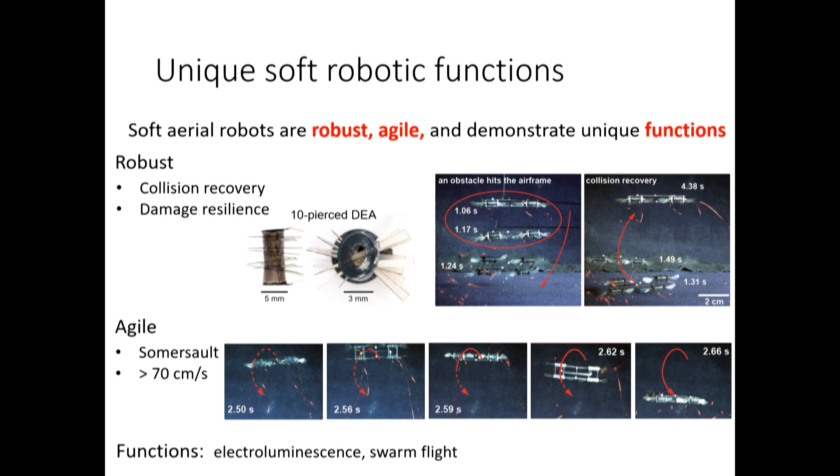So in the last 4 or 5 minutes, I want to address the question about what we are trying to do in the longer term. I would say that at this scale, one of the biggest challenges is to achieve power autonomy.

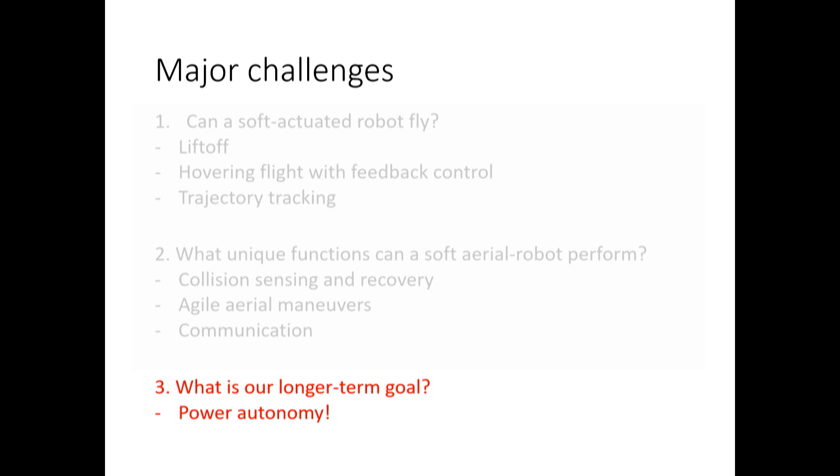We are very much aware of the performance gap between soft robots and state-of-the-art rigid robots. Back in 2019, there was a foundational paper published in Nature on a piezoelectric-driven power autonomous aerial robot. If we compare key performance metrics of soft actuators with rigid actuators—power density, lift-to-weight ratio, actuation voltage, and efficiency—you can see the soft actuators were way worse.

Because we make everything in-house, we know what to improve. As of 2 years ago, we have been able to significantly improve the power density of the actuator, and as a consequence, also improve the lift-to-weight ratio of this actuator.

But we also realized that the actuation voltage is significantly higher than 200 volts, which makes making a sub-gram power electronic circuit difficult. So with the requirement of trying to achieve power autonomy, we set out to reduce the actuation voltage.

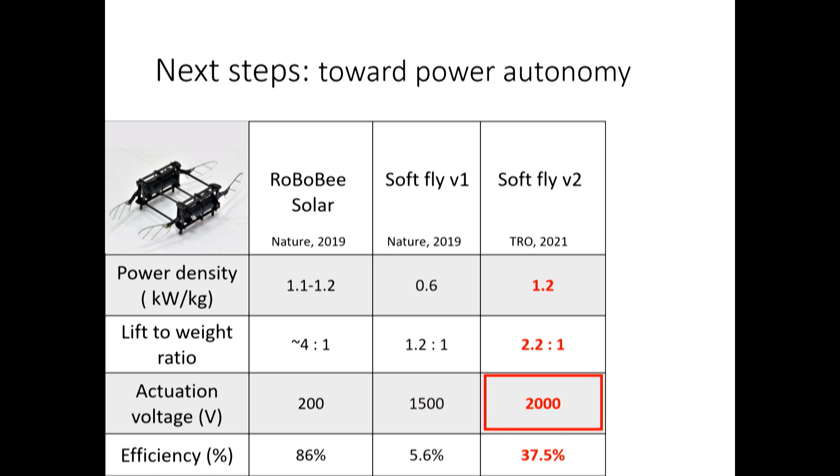On a higher level, the dielectric elastomer actuator is composed of a soft capacitor. To reduce the actuation voltage, theoretically at least, all you need to do is reduce the layer thickness. So we use a spin coating method, and intuitively, if you spin coat faster and faster, you can reduce the layer thickness, and hopefully reduce the operating voltage.

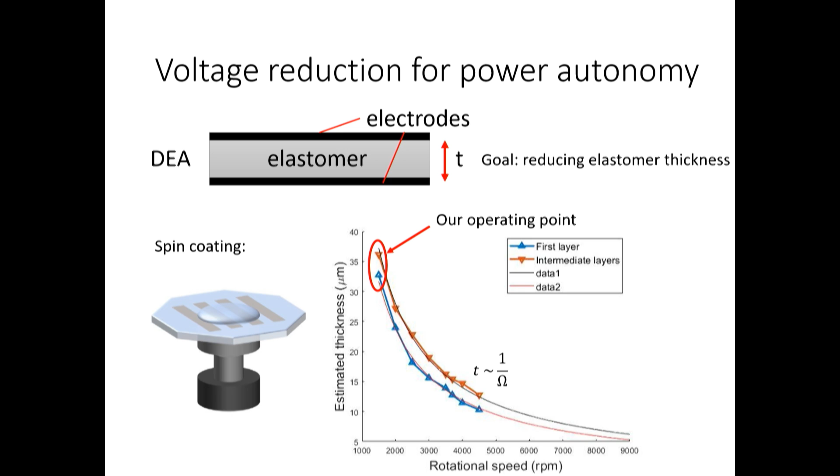As of 2 years ago, we were able to come up with an actuator that has a similar size compared to the previous actuator, but has a much larger number of layers, while each layer has a much thinner thickness. As a consequence, we can achieve similar block force and free displacement at a much lower driving voltage. What we previously achieved at 2 kilovolts, we now require about 600 volts to achieve, which makes the life of building power electronic circuits a lot easier.

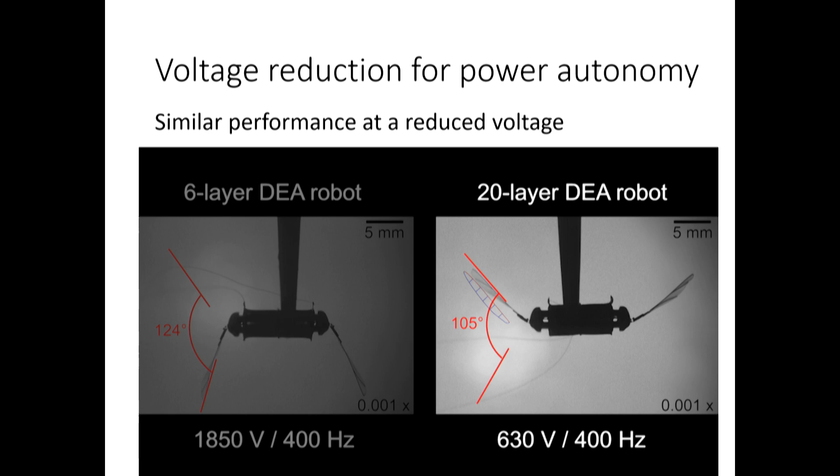As of 2 weeks ago, my students have been able to further reduce this voltage to on the order of 400 volts. So we are really spending a lot of effort trying to reduce the operating voltage, so that putting on onboard circuitry becomes feasible.

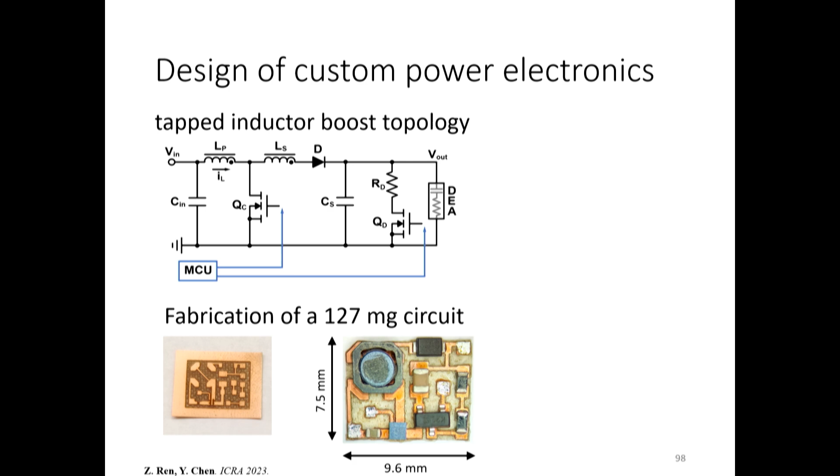With that, we developed the first tapped inductor boost circuit for our robot. This is still a very simple circuit topology. We make our circuit in-house, populate it with commercial components, and then put that tiny circuit on top of our robot. This robot weighs about 160 milligrams while carrying a 130 milligram circuit.

Now, I want to say that we are still far away from power autonomy. We cannot carry our own battery yet. This circuit still requires an input of 7.7 volt DC, and then it will convert that low voltage DC input into a 600 volt, 400 hertz AC output, which you can use to drive the robot.

We can achieve quite good flapping kinematics. Finally, the student is able to demonstrate takeoff while the robot is powered by this at-scale tiny boost circuit. In the first example, the circuit is off-board, and we are trying to add a 120 milligram payload to mimic the takeoff condition.

In the second experiment, we mount this circuit on board, and you can see the robot can still generate sufficient force to lift off. But of course, this is still very early stage work. We cannot put a battery on board yet, and we also don't have onboard computation. So these are really some of the key challenges we are trying to work on now in our lab.

Finally, I want to say that we are also working on new configurations. I'm very interested in the aerodynamics of wing-wing interactions. In collaboration with Professor Rob Shepherd at Cornell, we are working on a combustion-powered microflying robot. I'm very interested in trying to fly a large number of microrobots together.

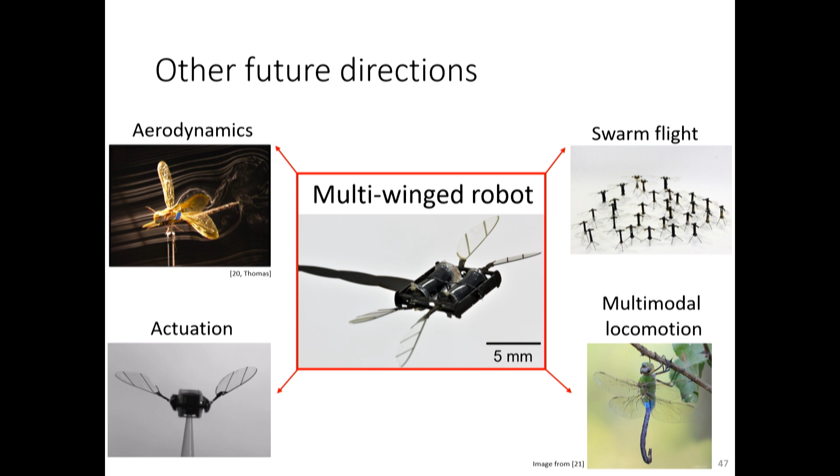We are also thinking about multimodal locomotion, so hopefully one day these robots can land on flowers or perch on tree branches. With that, let me zoom out and say that our longer-term vision is to deploy a large number of micro-scale robots in a realistic environment.

We are still very far from it, but hopefully I've convinced you that we are addressing key challenges in actuation, control, and planning. I would argue that the next 10 to 15 years will be a very exciting time for people working in this area.